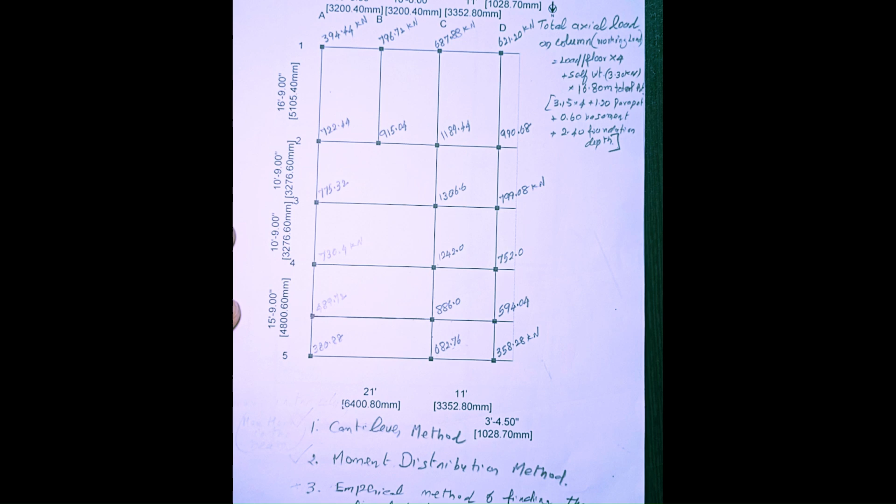This is the column layout of the building for which we are going to do the structural design. Okay, these are the total axial loads on the respective columns. This we arrived at in the previous video. The column moment will be there only in the columns remaining in the exterior of the building.

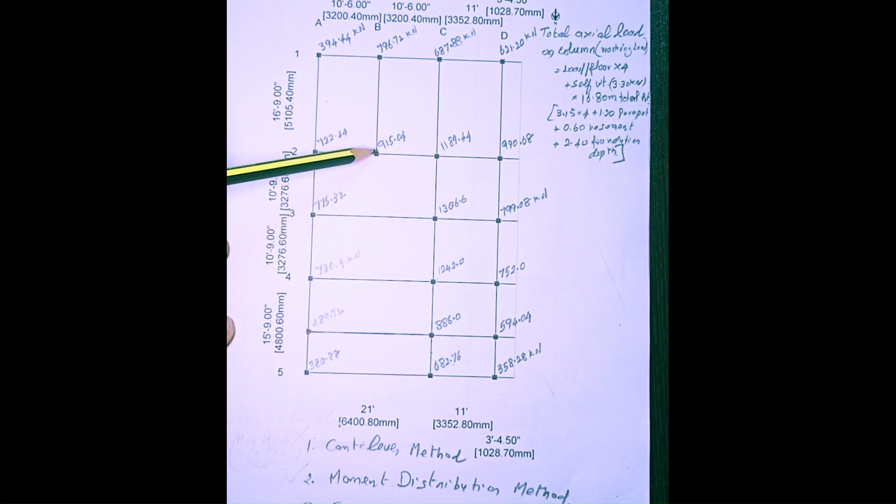These columns 1, 2, 3, 4, 5, 6 will have bending moment, as well as these columns, as well as these columns. And this column will also have bending moment because there is no beam on this side. So this is a 3 beam junction. This will have bending moment. This column will also have some bending moment.

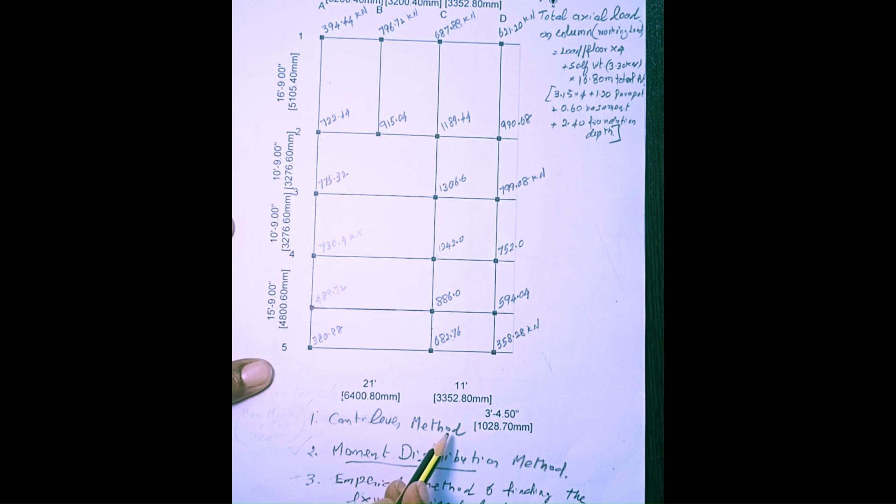Okay. Calculating the bending moment in the column is done mainly by the moment distribution method. The cantilever method is generally used for the horizontal load caused due to wind force. So this we shall take in some other video which will come later. Now we should do the design based on the moment distribution method only.

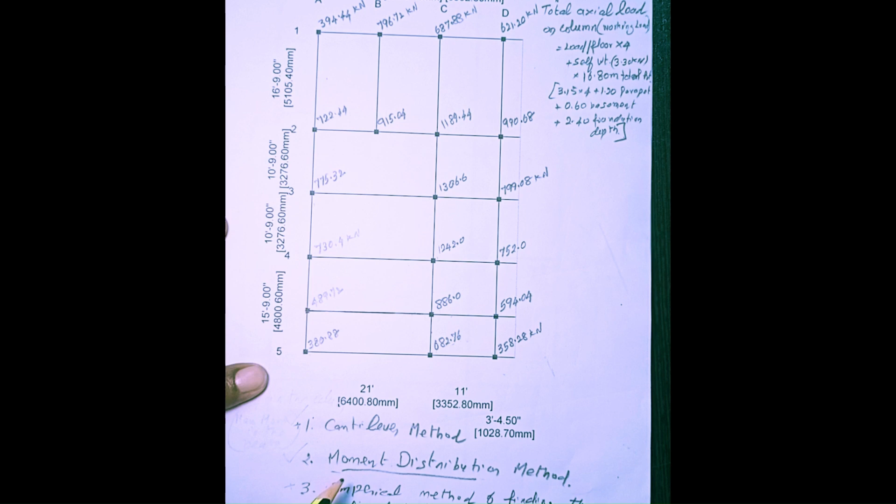But describing this moment distribution method will be a laborious thing involving major calculations. So going into that will not be so easy. So we shall have a rough idea to calculate the bending moment in the column. Before that, I will give a short introduction about this moment distribution method.

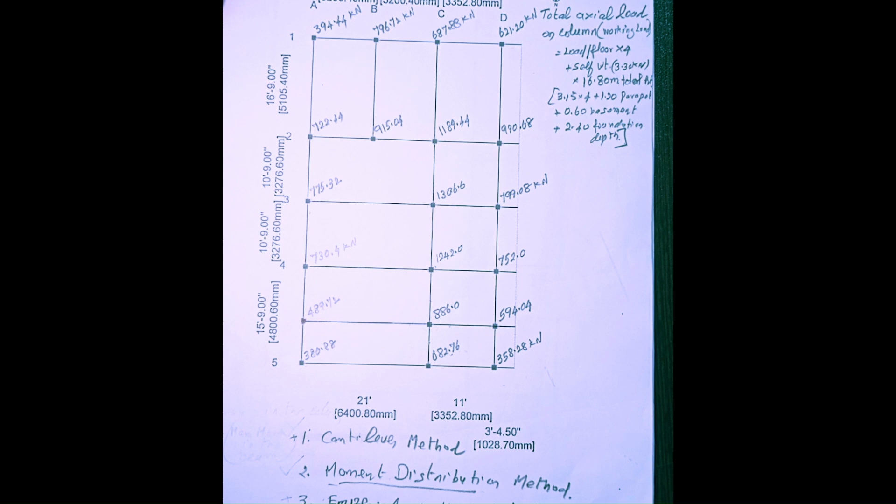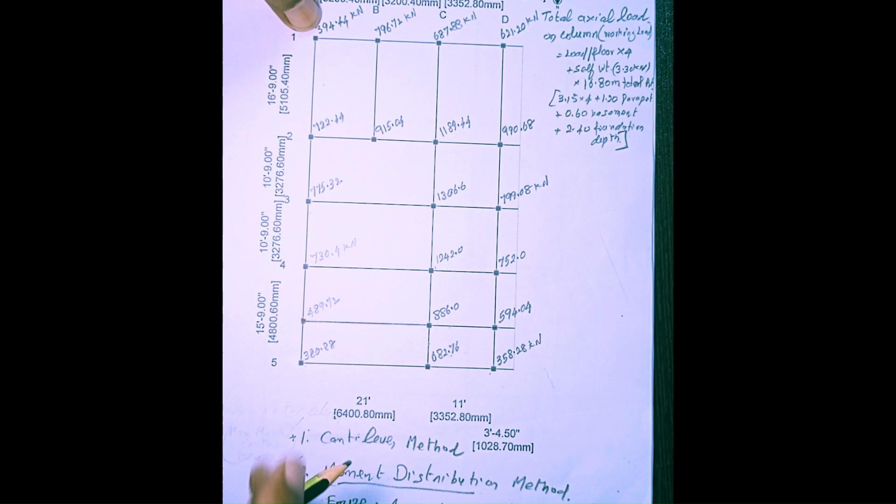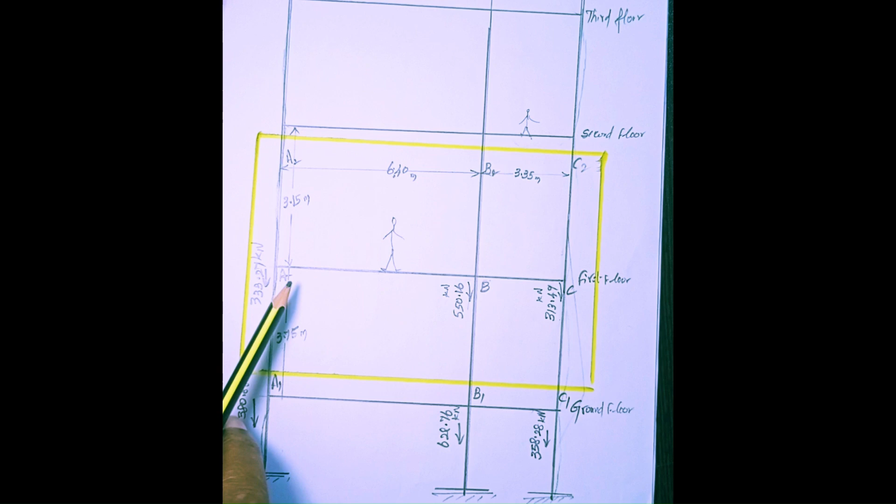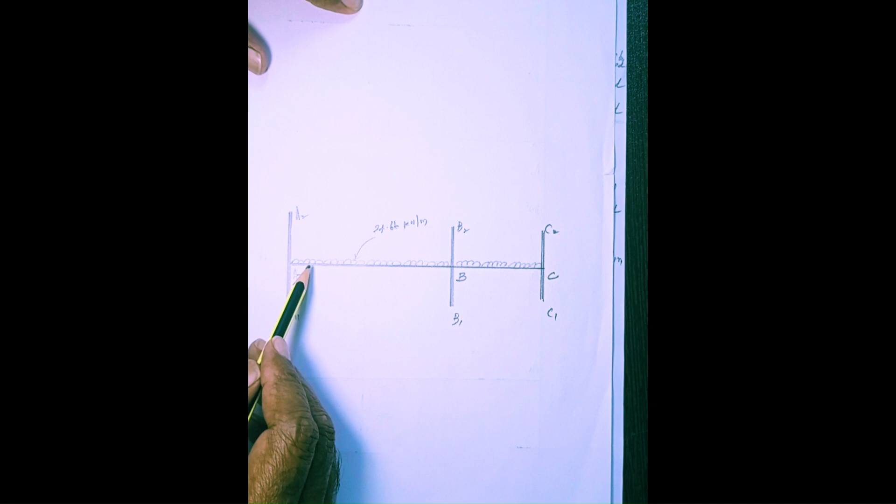Here we are going to design the ground floor roof slab or first floor slab. To design, we make a calculation for the frame noted within this yellow line. This is the first column, central column, last column. The junction point of the first column and the beam is called A, then B, C. This column junction is called B, this column junction is called C. The lower part is A1, higher part is A2, the lower B1, higher B2. These things I have named.

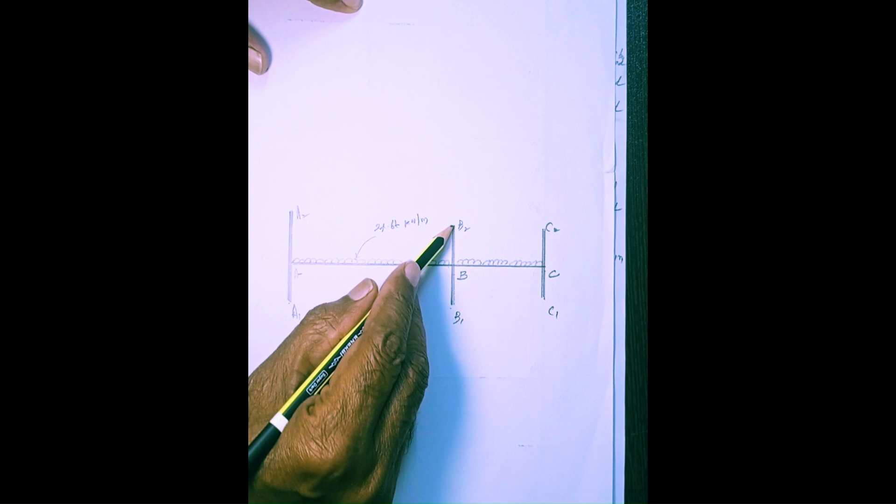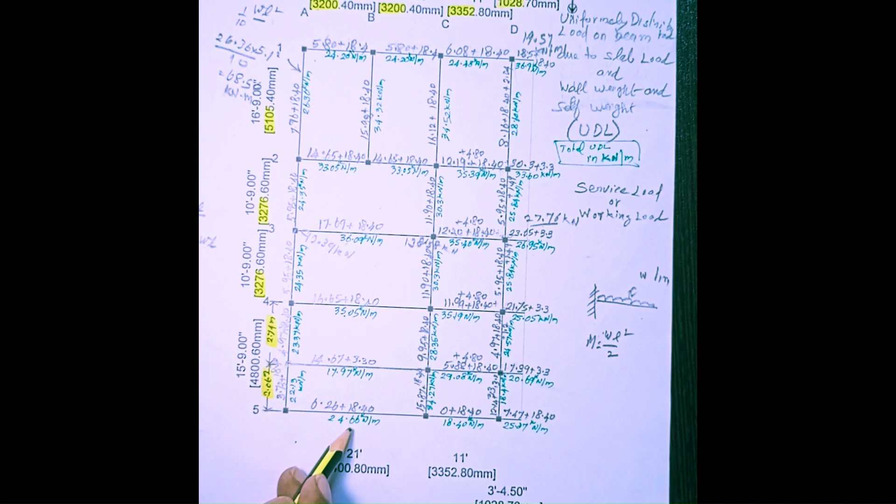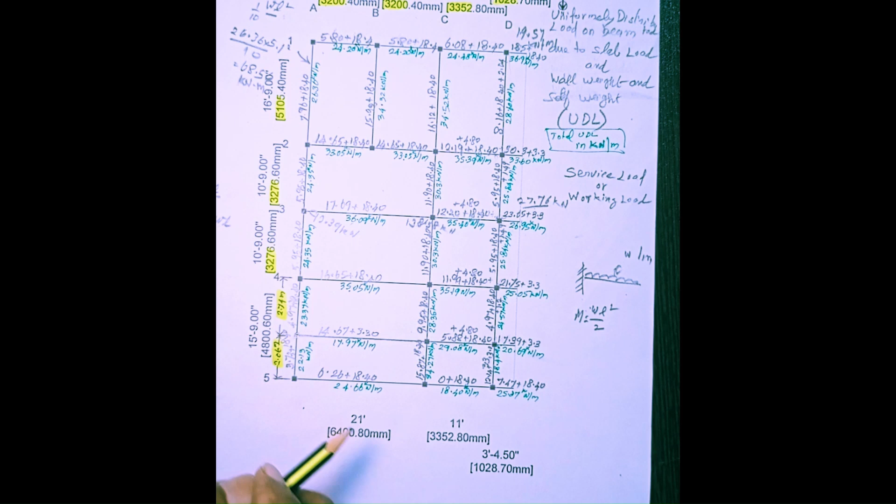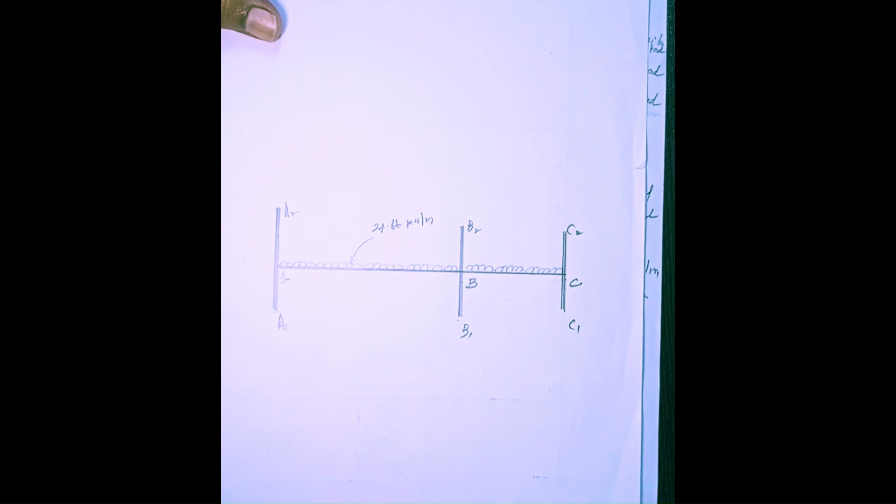This is the layout of the building. This green line indicates the UDL, uniformly distributed load on the beam. This uniformly distributed load is required for finding the bending moment in the respective columns. Now we shall go to the Microsoft Excel sheet, where I have made the calculations easily. This is the tabulation made in the Excel sheet: moment distribution of frame number 5 with 3 columns.

Considering all the joints are continuous and fixed. Okay. Here we need these 9 data. What are the 9 data? The uniformly distributed load over the beam, column length ground floor, column length upper floor, span 1 length in meters, span 2 length in meters, then beam depth, column width, column depth. These are the items required to calculate the bending moment in the column.

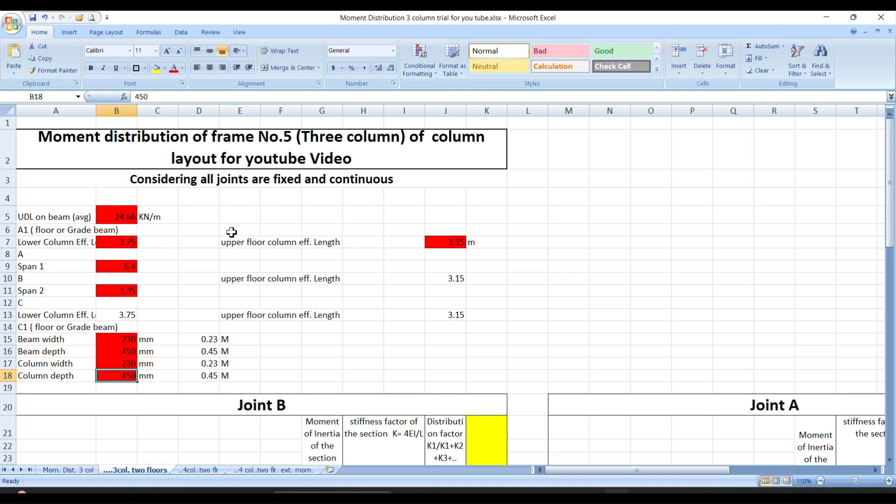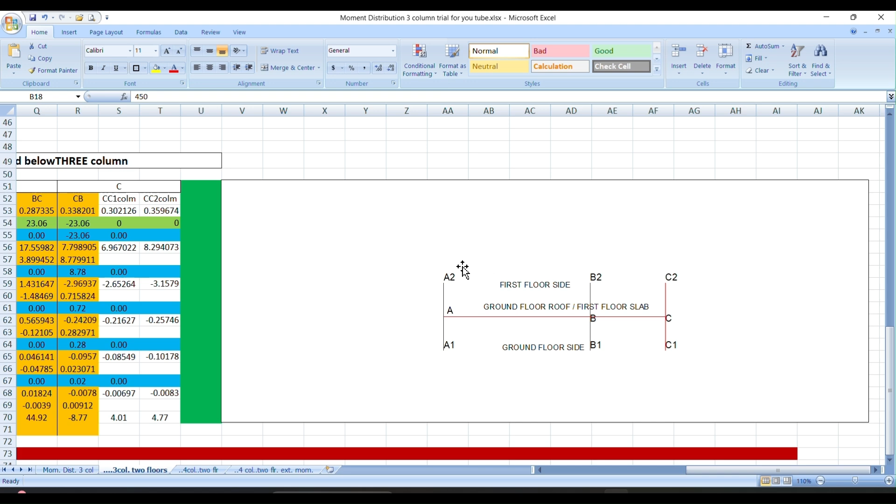This is the same sketch we saw previously. This is column, this is column, this is column. This one is beam. Joint A, joint B, joint C, I have given the names in this way. So this span and so on we are feeding into this calculation. By feeding these items, as far as joint B is concerned, we are going to calculate the beam moment of inertia with some formula from the previously said data.

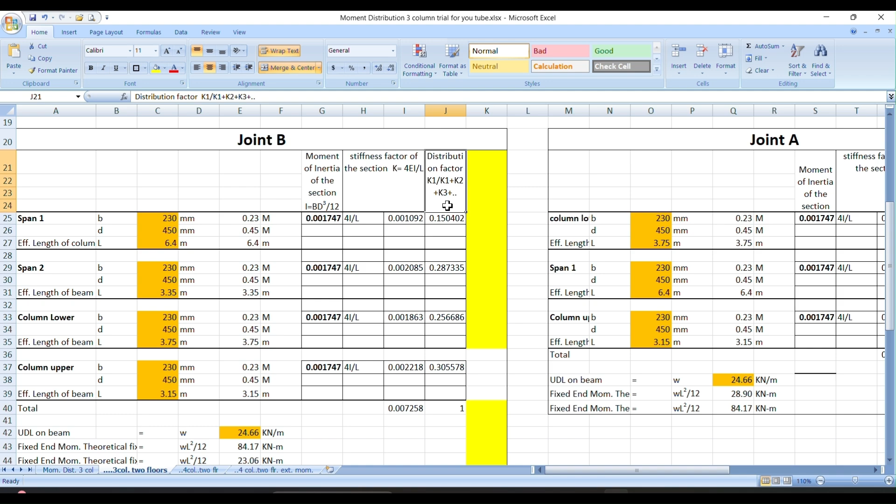From that, we are going to find the stiffness factor of the section. From that, we are going to find the distribution factor. These items will be required in the moment distribution table. This is the actual table required for calculating the bending moment in the column. This is a simple table, but the calculations are done repeatedly 4 or 5 times. These are the spans. These are the joints, A joint, B joint, C joint.

This A1 is a column, A2 is another upper floor column. AB is the span or the beam span. BA is the same span but read from right to left, that is, the hogging bending moment on the right hand side is found here. Likewise, everything is given here. So the distribution factor, as we calculated in the previous table, is placed here.

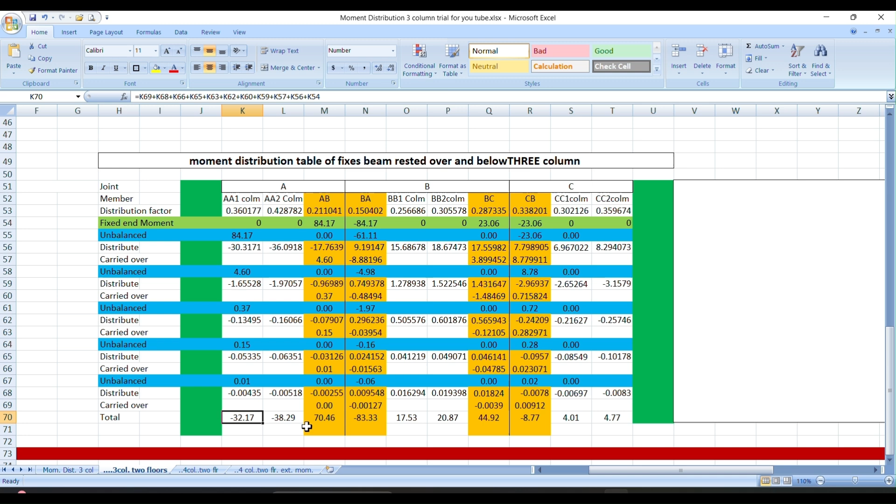Then the fixed end moment is based on WL squared by 12. Then it is distributed like this and carried over. Some formulas, some methods are there. These are simple things only. On totaling all the moments in the columns, for the A1 column this total amount, 32.17, is the bending moment in that left side column. In the floor side, 38.29 is the bending moment in the column on the upper side, that is in the first floor.

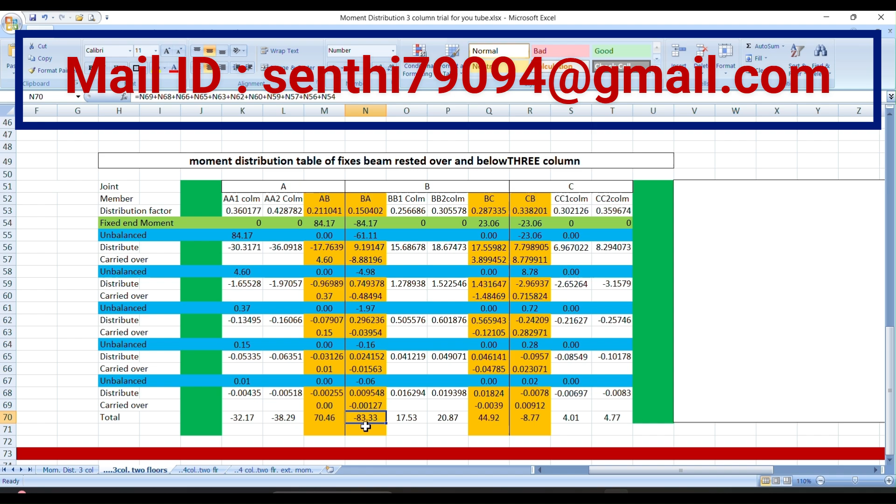Likewise, AB means from left to right. The span's left side end hogging moment is 70.46. For the same beam on the BA side, the beam's moment on the right side is 83.33. Likewise, we can calculate all these things. On working out the column bending moment through the moment distribution method, I have found that the column bending moment in this column is 31.8, in this column is this much, this column is this much. I have worked it out in this way.

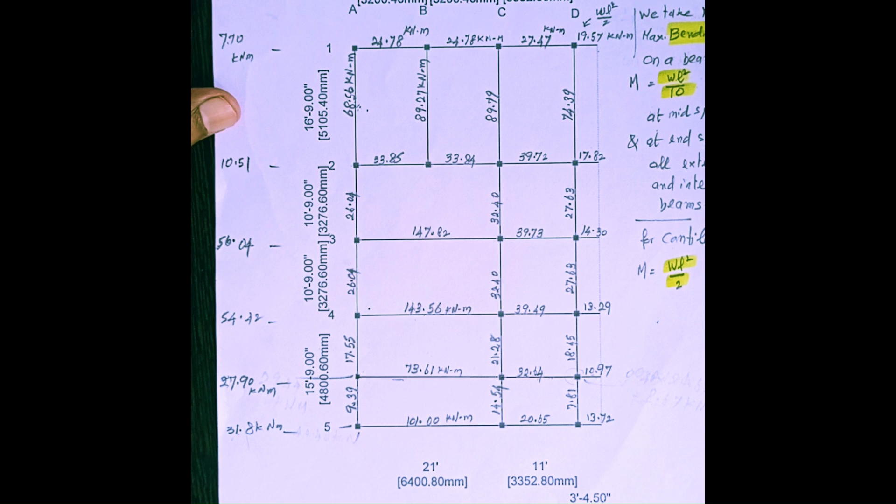But working out the bending moment in the column using the moment distribution method, based on very long calculation, is not possible every time. This can be done in an Excel sheet. But before that, for completing this video, we shall find one crude or empirical method to describe how much this column bending moment will be. These values are the maximum bending moments on the different beams. So I make an empirical relationship that

0.4 into this bending moment: 101, the beam bending moment, into 0.4 is equal to 40.4 kilonewton meter, whereas this is coming as 31.8. So we are going to adopt this as 40.40 kilonewton meter. As well, 73.61 into 0.4 is 29.44, whereas this is 27. 29 is more than that, so we can design for 29.44 kilonewton meter.

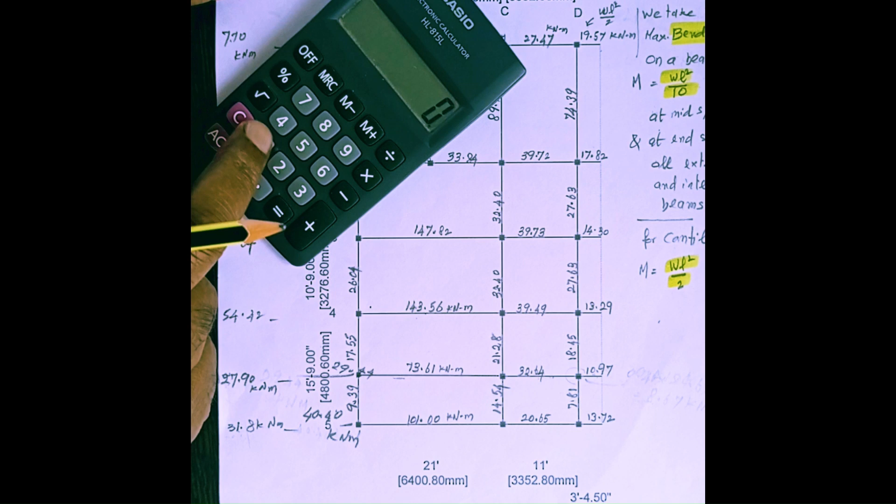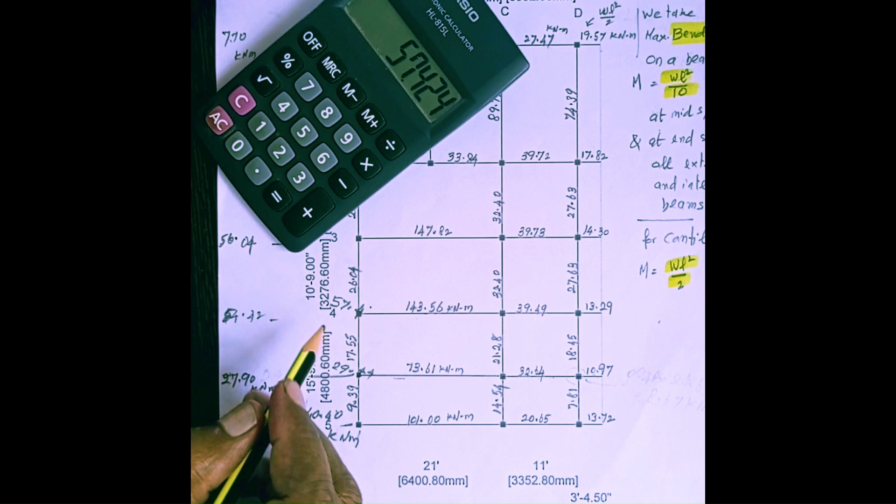And 143.56 is the maximum bending moment in this beam; into 0.4 this is 57.4, whereas the worked out method is coming as 54. So 57 is more than 54, and we can use this. In this way, I find the column moment may be approximately equal to 0.4 into the beam moment at the exterior column. Exterior column means the outer column, in this way and this way. This is the empirical method I have found.

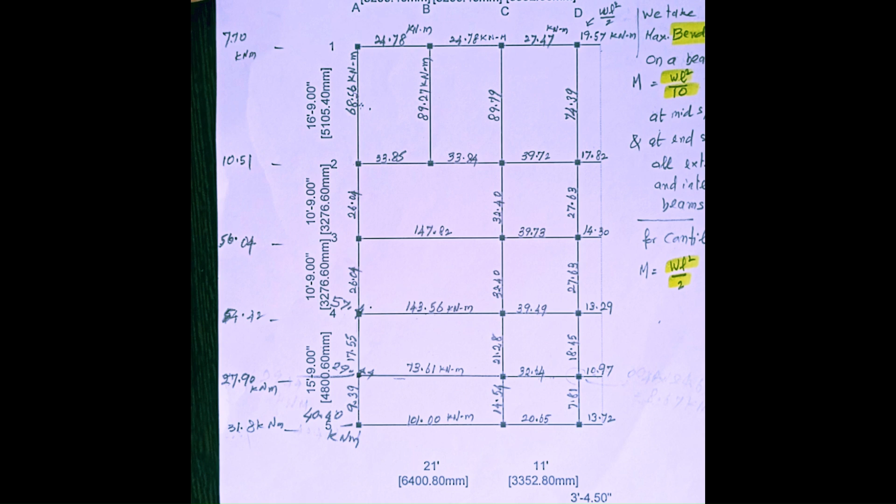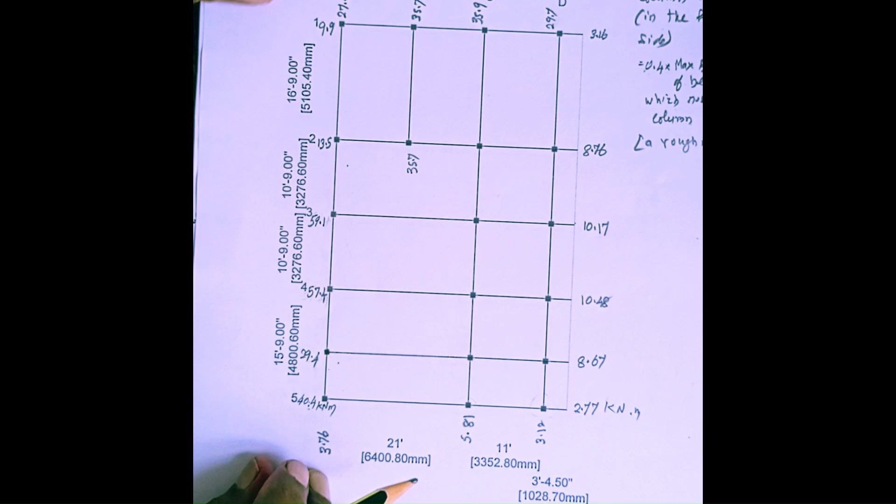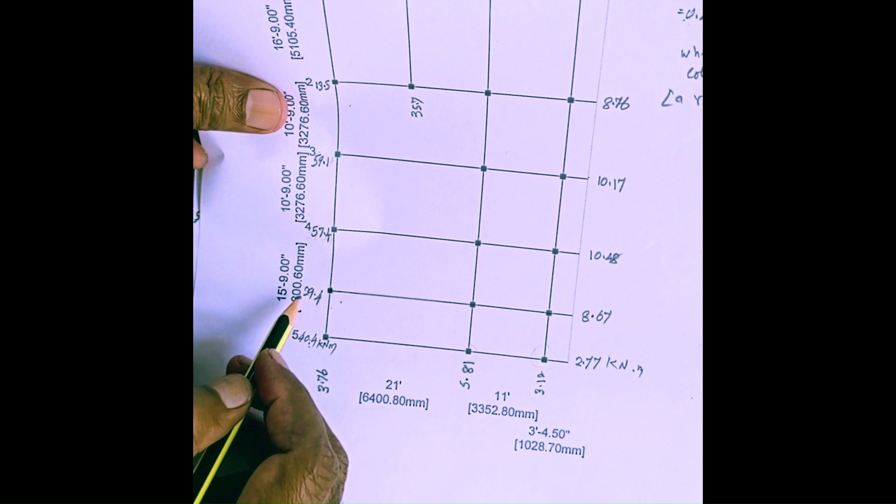So we will follow this till the completion of this design process. Then we shall come and do the moment distribution calculation later. I have calculated the column bending moment from the maximum bending moment of the beam, by multiplying by 0.4. I have written it near every column, the similar way we did in the previous drawing. For this drawing it is 40.4. We worked out 29.44. In this way I have worked out.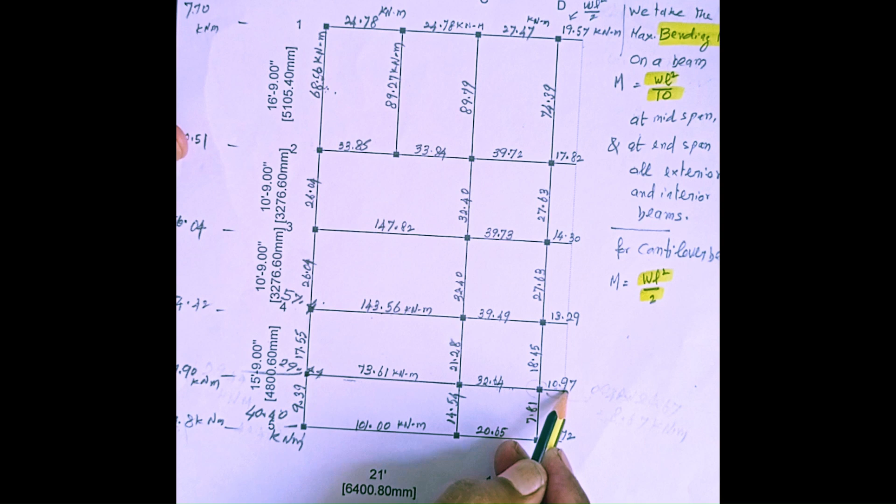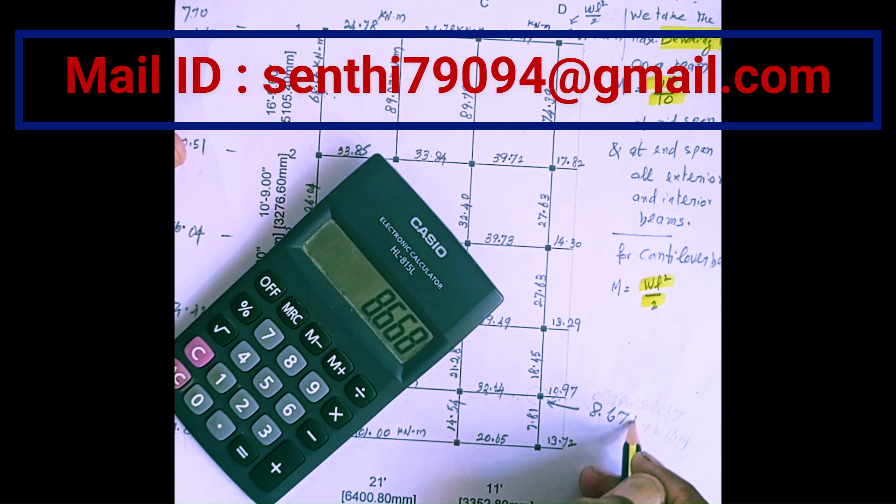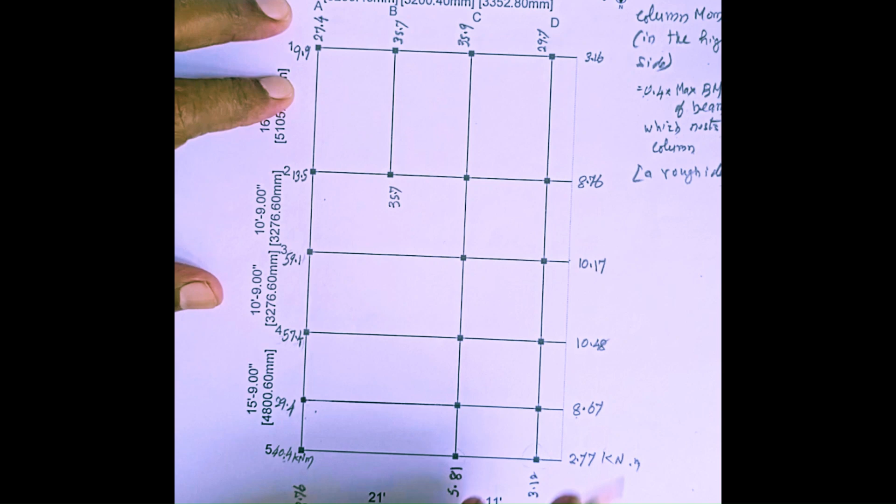See here, this is a beam resting on these two beams and it extends as a cantilever. So the balance bending moment in the beam will be calculated for arriving at this column bending moment, meaning 32.64 minus 10.97. This is the balance bending moment after neutralizing the hogging bending moment on both sides. This balance bending moment into 0.4 is the column bending moment I am assuming, 8.67 kilonewton meter. See here I have written 8.67. Similarly, I have made the calculation in all the drawings, for all the columns.

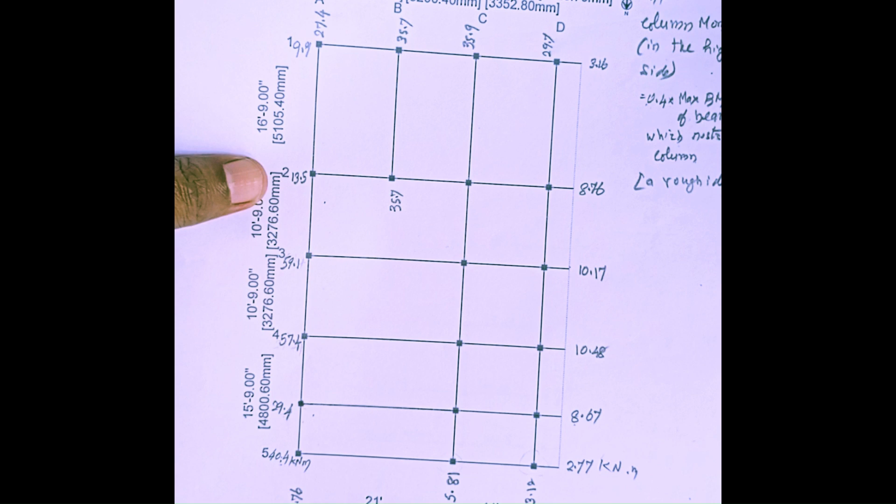Now we are going to design. Design means arriving at the size of the column, the reinforcements, etc. That we shall see in the next video.